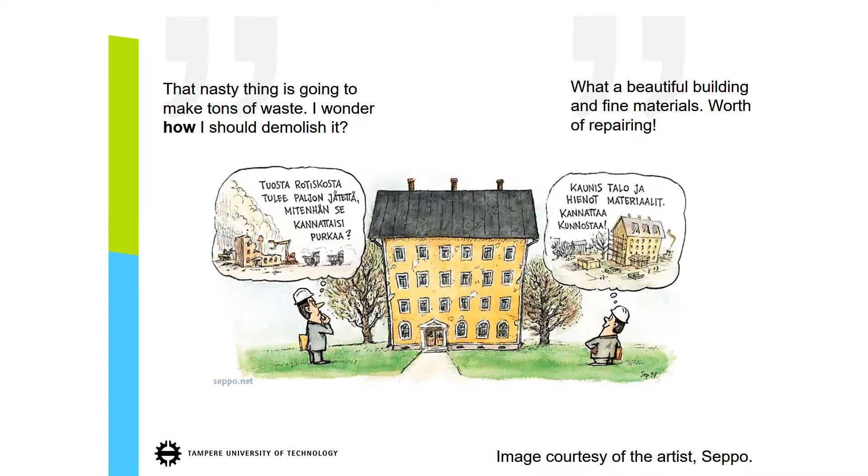Here's the fundamental question of the lecture, or even the day. I chose this image because it quite nicely underlines the very relative and subjective nature of this question.

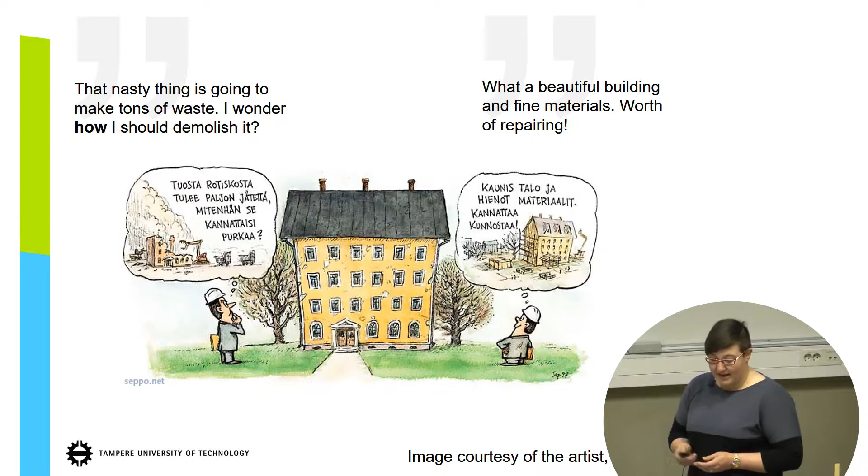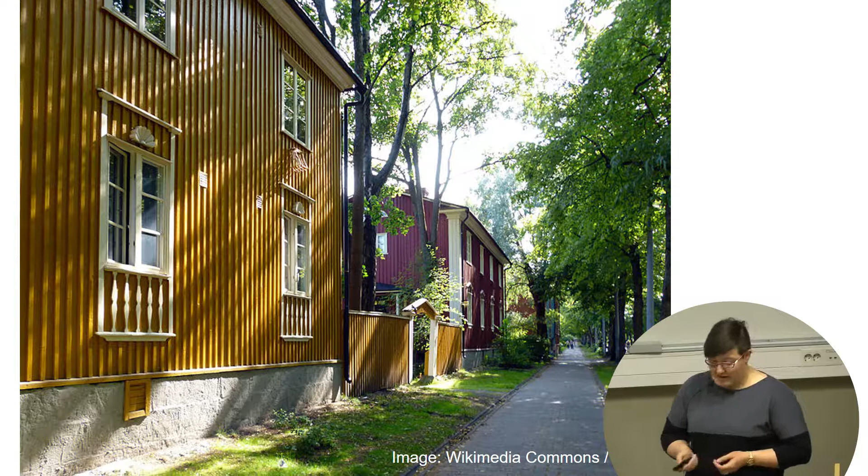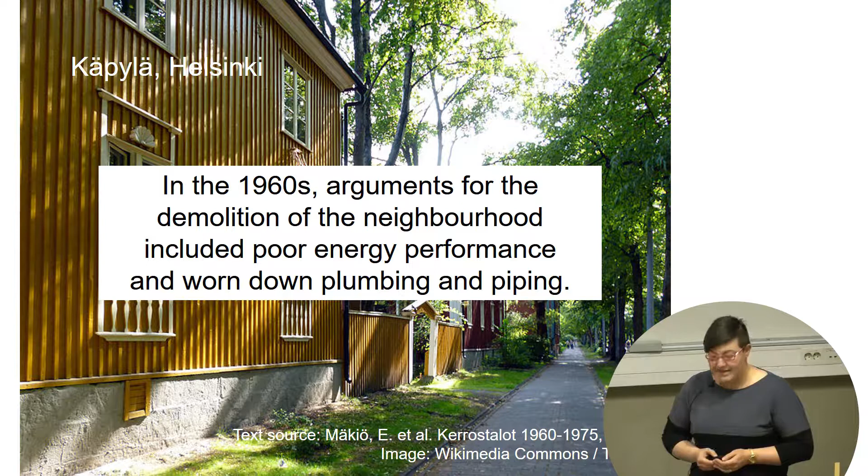What we see as worthy to keep varies not only between individuals, but also in time. This is a Helsinki neighborhood that is today very precious, high prices, but in the 60s the arguments for its demolition were awfully similar to what we use today. Energy and plumbing. The same goes for the Finnish National Gallery Ateneum building.

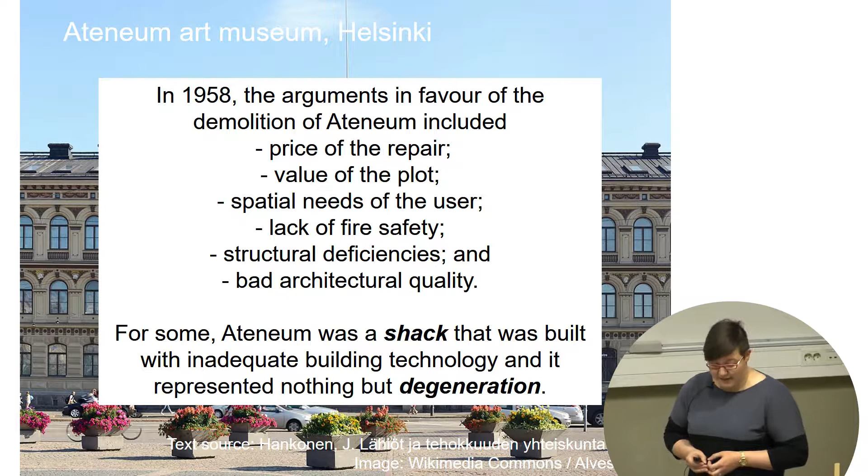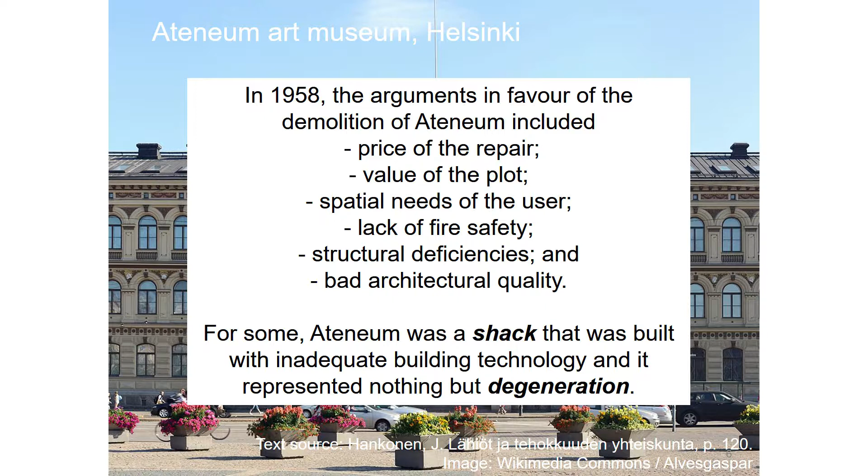In the 50s they listed almost all imaginable reasons to support its demolition. It was too expensive to repair, the plot was too valuable for this building, it didn't fit the needs of the user, it wasn't fire safe, it had structural deficiencies, and even bad architecture. Could you believe it? So today we see a phenomenon of value inversion, where we think differently.

We can conceptualize the building stock like this. We have the existing stock that consists of buildings that are normally in use, but also a part that is vacant or underutilized. You always need some vacancy in the housing market. If you didn't have any empty flats or empty premises, no one could ever move. So you need some vacancy, but a part of the vacancy is long-term and problematic.

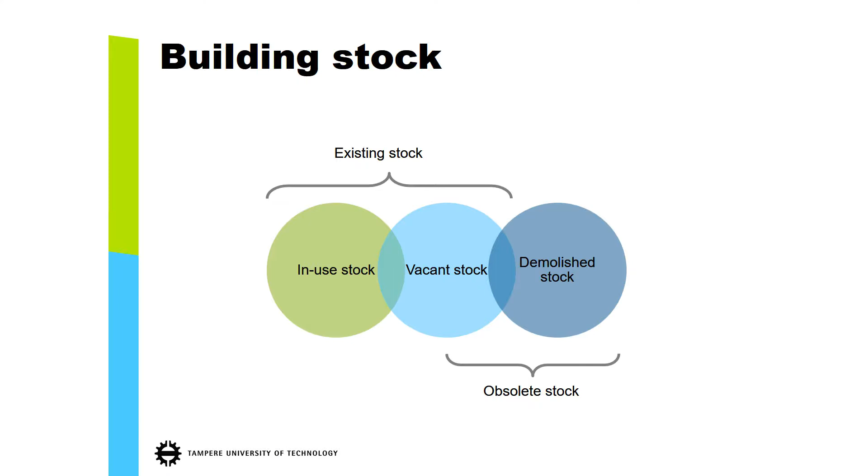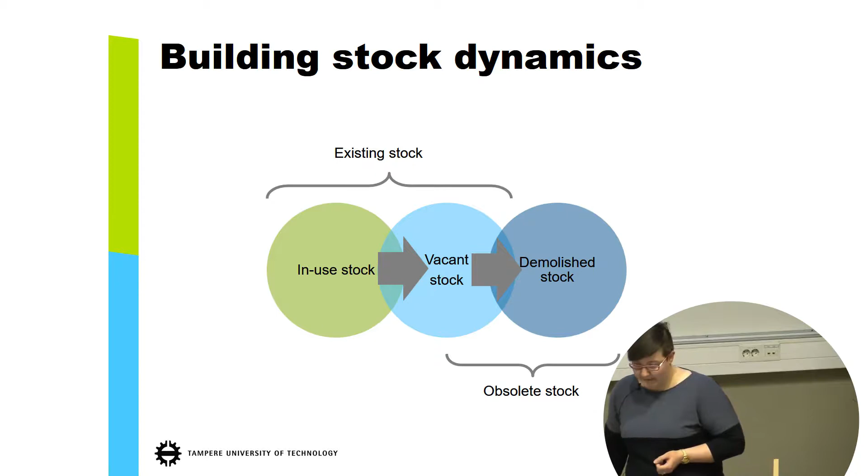And we can think that a part of this stock is moving towards the demolished stock, so it's at risk of being demolished. We can call this part of the stock obsolete, which means outdated in a sense. We often think that since buildings are completed, they are bound to move towards the problematically vacant stock and eventually to the demolished stock.

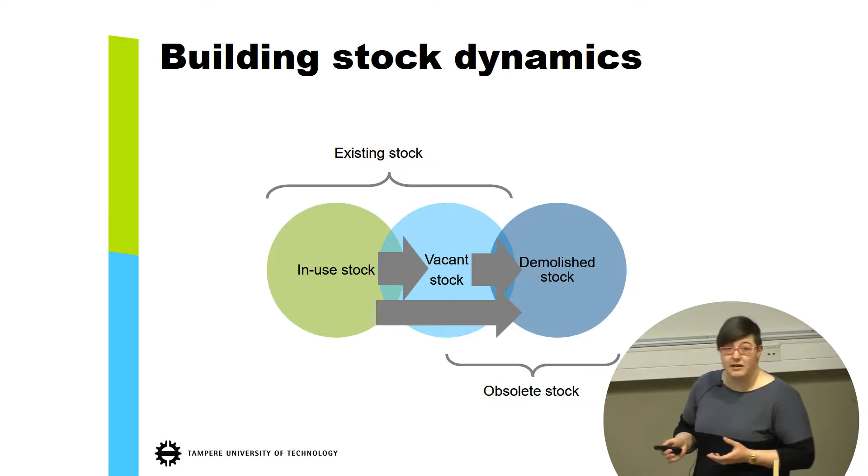But buildings are not people or biological creatures, so buildings don't have a biological maximum life. If they are maintained, they could last virtually forever. So this kind of development is really not inevitable at all. What's more, buildings are often demolished directly from use, so they never enter the vacancy phase.

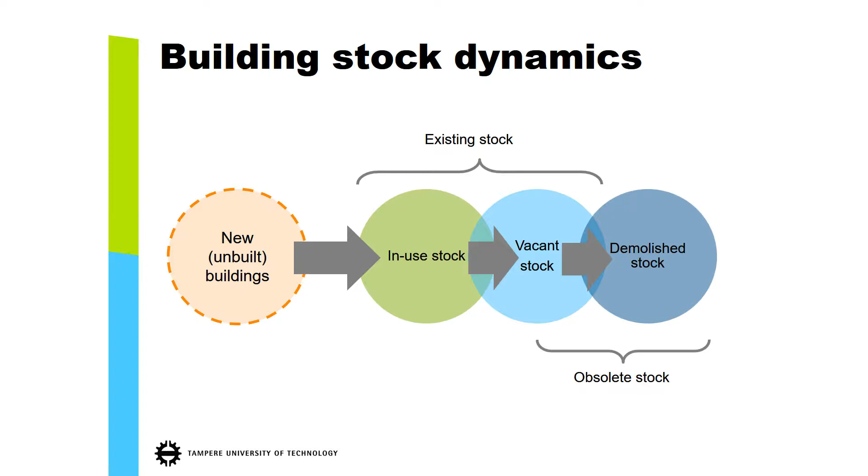This dynamic is also affected by new construction, and we can ask how it really affects demolition. We are inclined to think that we need to build new buildings to replace the obsolete ones. But if we do excessive new construction, more than is really needed, that could push some existing buildings that could still be usable to the demolished stock.

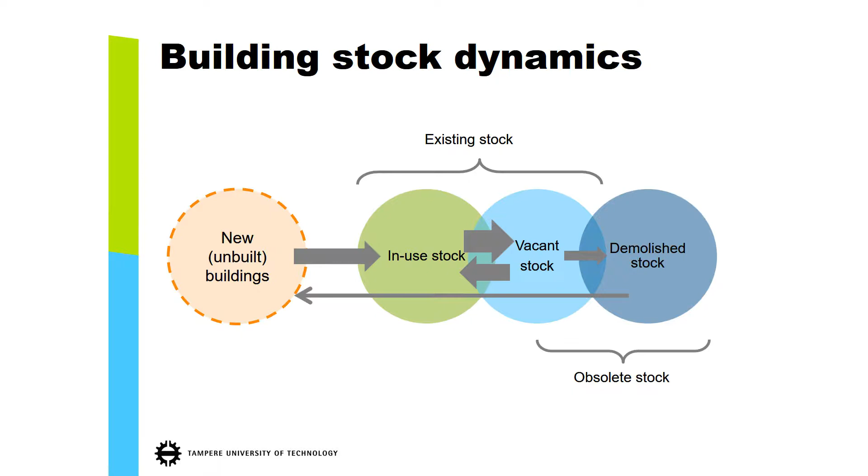In a more sustainable system, this path would not be linear, but buildings would return from obsolescence to use, and as a result, less would be demolished and less would be built. The demolished buildings could act as sources of recycled raw materials for new buildings as well as for repairing buildings.

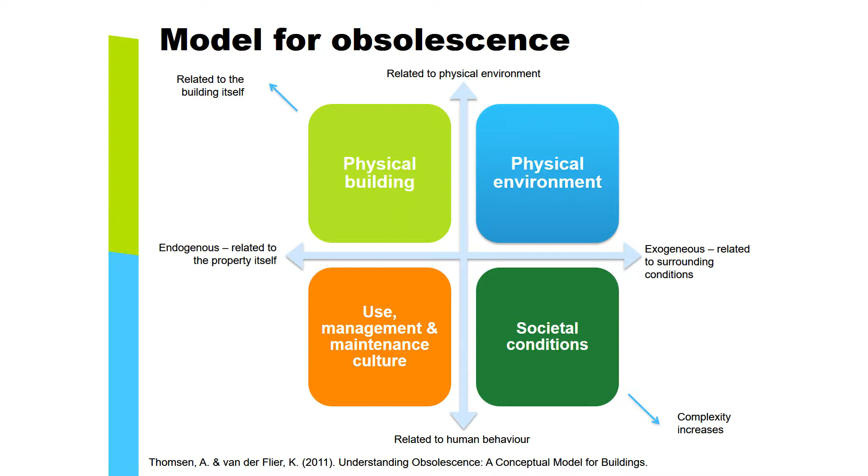So we can measure some qualities of buildings objectively, like the energy use, how much energy a building uses. But whether that amount of energy is a lot or a little, good or bad, is a question of your expectations. For example, the norms we have for new construction would belong to this corner. They also inform your expectations for older buildings as well.

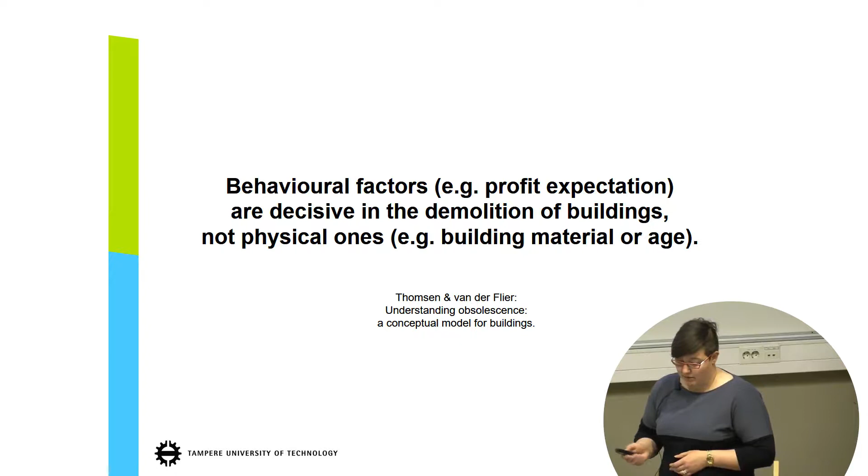In the end, researchers have found that behavioral factors are decisive for the demolition of buildings, not physical ones such as material or age. For instance, if we look at the average ages of demolished buildings in Finland, residential buildings are on average almost two decades older at the time of demolition than office buildings. So this year, an average demolished block of flats in Finland will be about 60 years old, whereas an average demolished office building will be about 40 years old. There's no reason to believe the structures of these two building types differ enough to explain that gap.

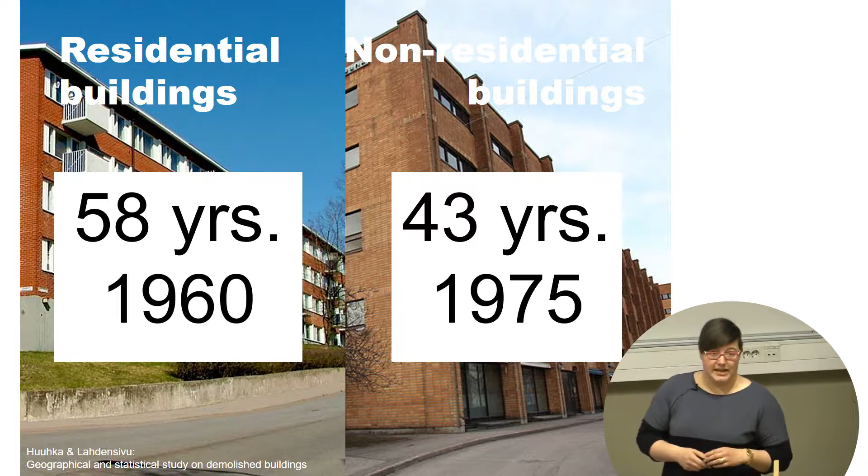Instead, you can explain it with function and ownership. The office building is likely owned by a real estate company, so it's in the hands of one owner, whereas in the block of flats, all the residents own the apartments, so you have like 40 owners or so. It's much easier for a company to decide to demolish than for a community of 40 people to agree on an issue like that. It also depends on the owner's expectations, because the real estate company expects to maximize profit, whereas the residents are more interested in the residential service the building provides them, not necessarily the value of the plot or how to maximize it.

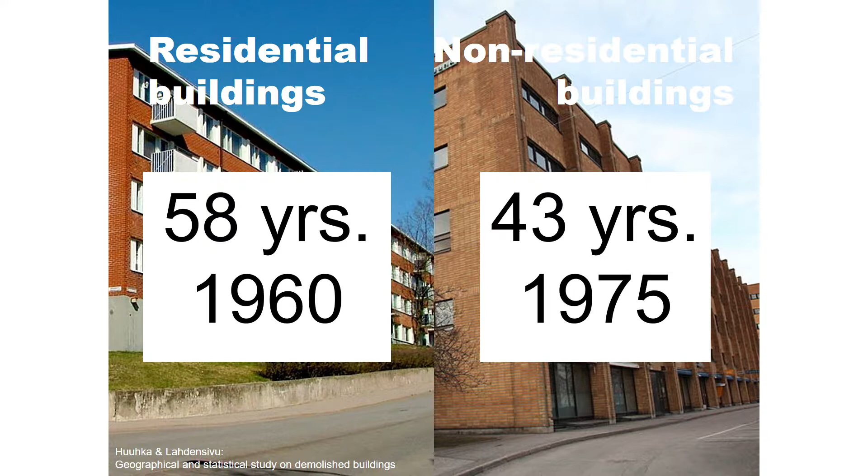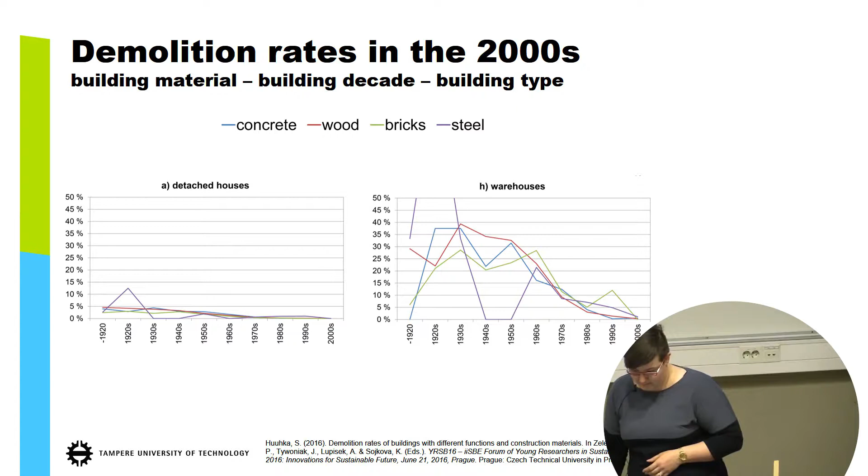If we bring the building type, the function of the building, into this picture, we can see great differences between different building types. I chose here just two examples of two extremes: detached houses and warehouses. You can see that regardless of the material, the demolition rate of detached houses is around the same. But the difference is enormous compared to warehouses. Even though there's a greater distribution here, the rates are incredibly higher. So the building type is actually more decisive than the building material or the building age.

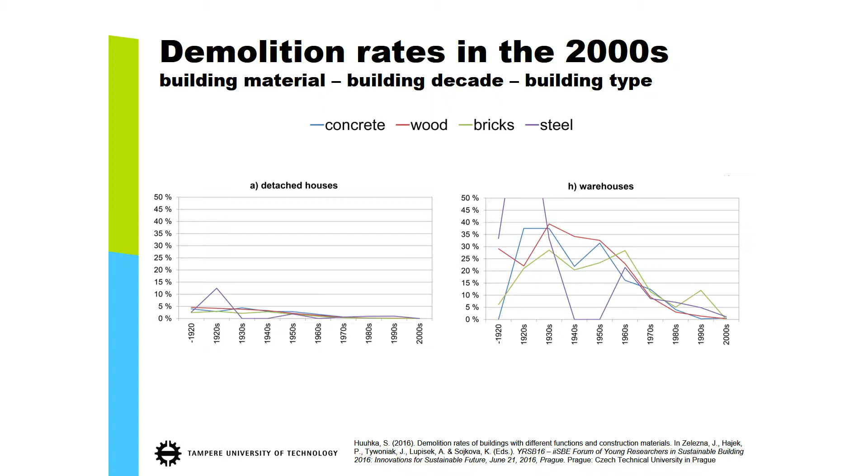Researchers in the Netherlands found that demolished buildings often do not represent the physically worst part of the stock, but an acclaimed bad condition is a socially acceptable reason for demolition. It's a more acceptable reason than, for example, bad business or bad residents in the case of rental apartments.

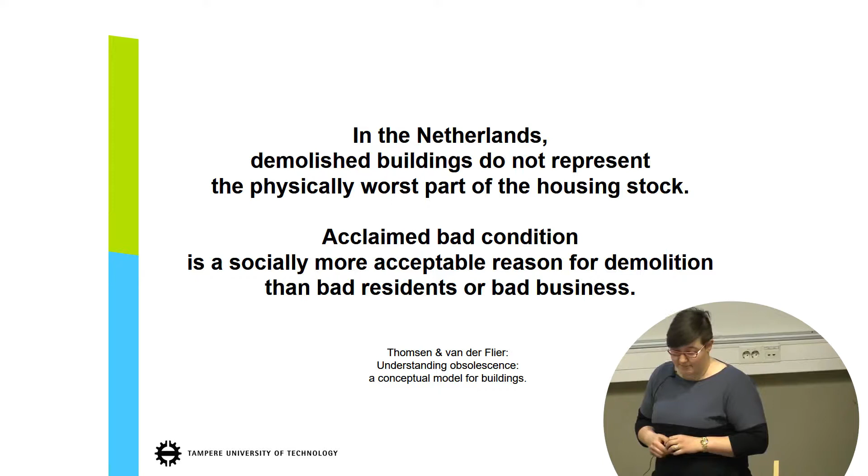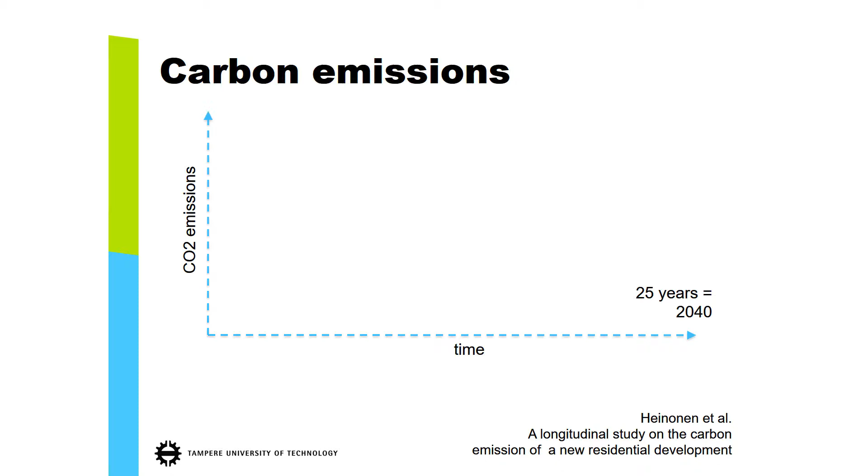Another popular argument besides condition is the energy use of buildings. I want to walk you through this theoretical comparison of carbon emissions. Here on the x-axis, we have time from this point, some quarter of a century, and on the y-axis we have the CO2 emissions. In this first scenario, we have the continued use of buildings: every year, a given amount of emission originates from heating the existing building stock.

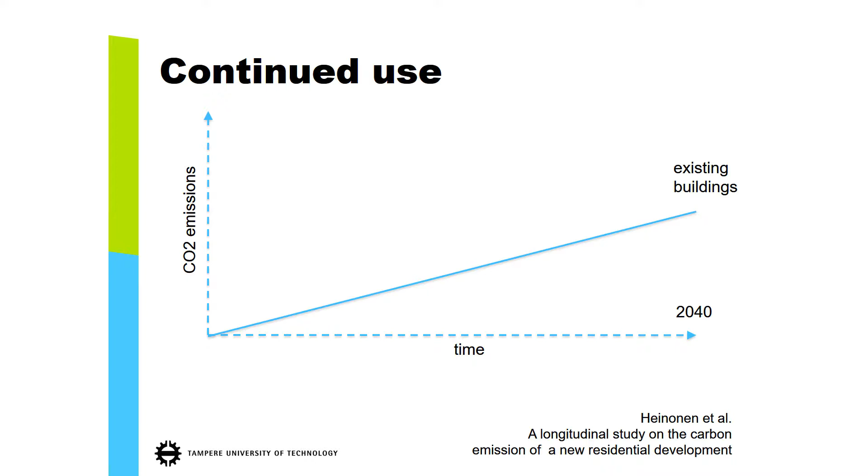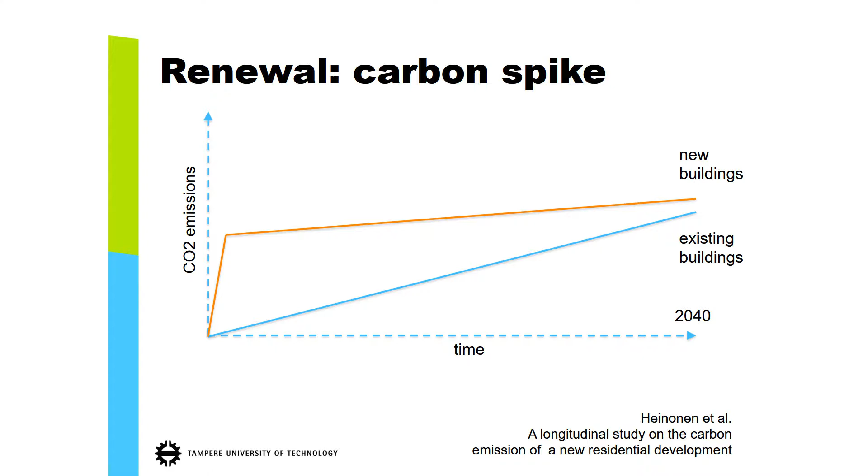And let's compare that with a scenario where the existing buildings would be replaced with new ones. You immediately notice here in the beginning this carbon spike. That originates from constructing the building, manufacturing the building material, the concrete, for instance.

So if we assume that new buildings are more energy efficient, they use less energy than the old buildings, it starts to accumulate from here. But because of the carbon spike in the beginning, it'll take more than 20 years to actually use less energy

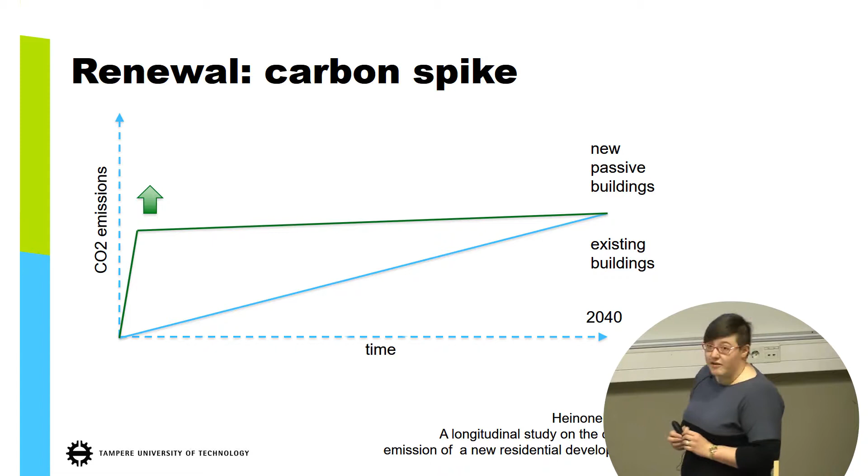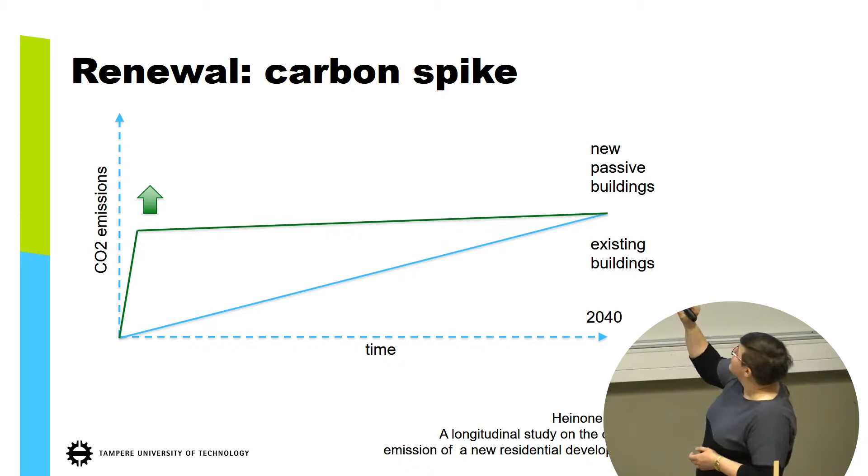than if we would just have kept using the old buildings. Building even more energy efficient buildings, like passive standard buildings, is not a very good answer either, because you get a higher carbon spike. You need more insulation materials. But the buildings are more efficient during the use phase, so maybe in 2 or 3 decades you will use less energy.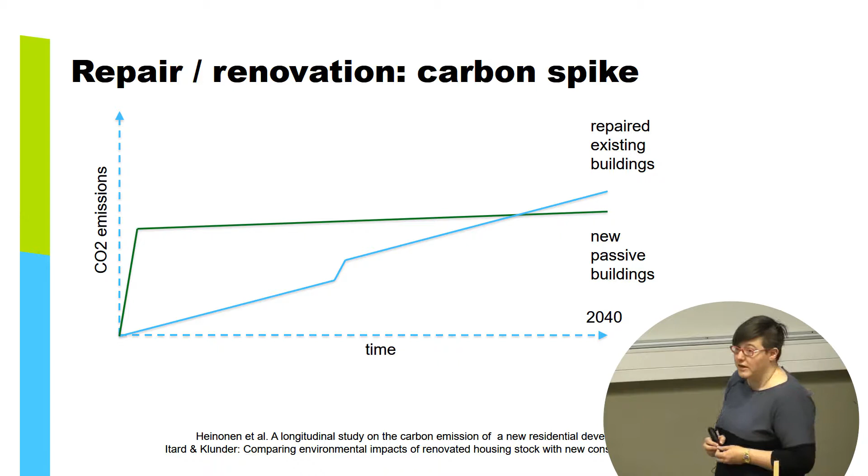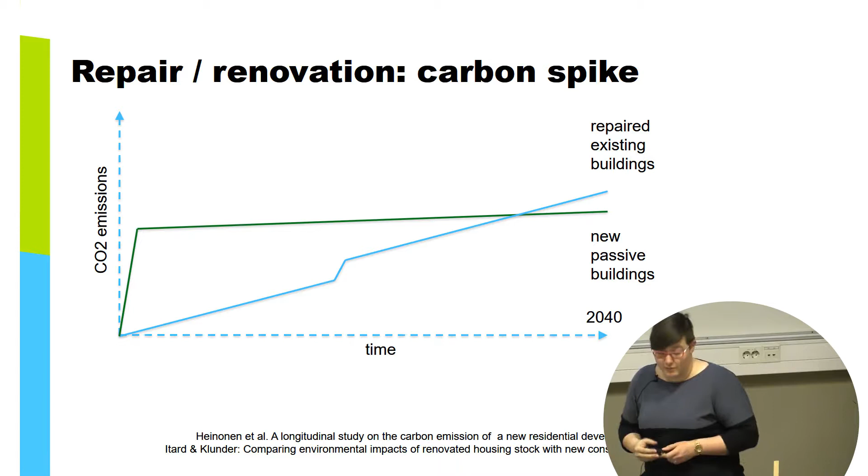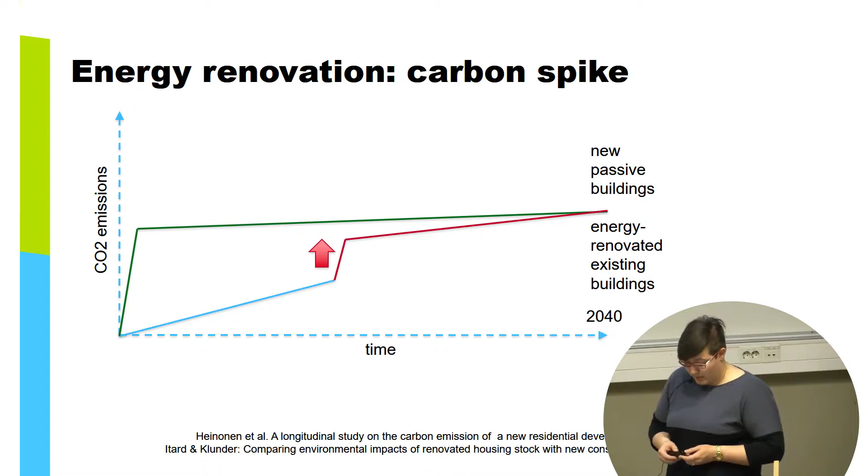Of course, we must acknowledge that we need to repair the existing buildings as well in order for them to last. So this causes a similar carbon spike as new construction. It's just smaller because the majority of the building already exists. And here too, if you increase the energy efficiency of the existing buildings, the carbon spike will respectively be higher.

So here we have all the scenarios, and now we're wondering what's the one that we should choose. And to make that decision, I have to inform you about one more thing, because this is a theoretical examination. So we assume the new buildings are more energy efficient than the old ones.

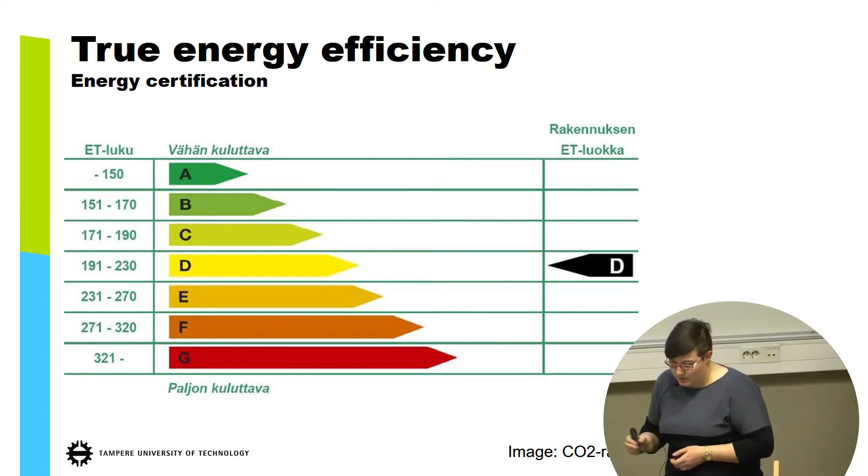But are they? And to do this, I will need to use this energy efficiency class rating. I suppose you are all familiar with this. A is better and G is worse. So according to calculation, the newer buildings are more energy efficient than the older ones.

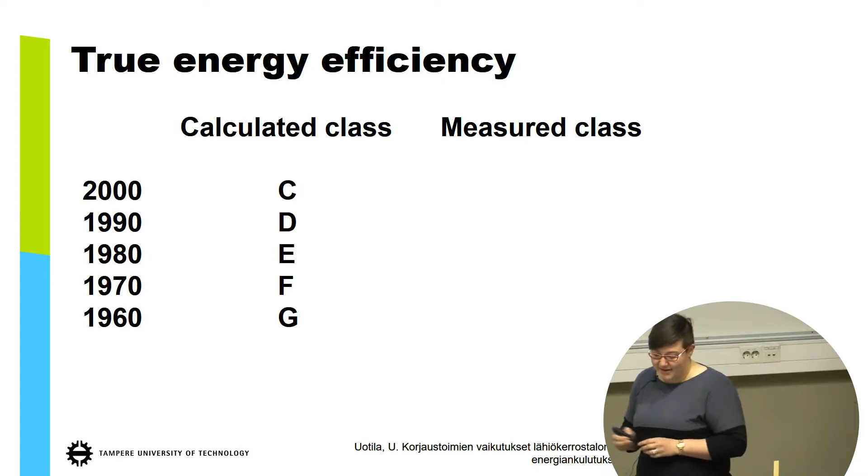Something like this. A colleague of mine at Tampere University of Technology did a research on the actual energy use. And guess what? The newer buildings were not better than the older ones. Almost all blocks of flats in this study, more than 700 of them, belong to the energy efficiency class F, which is not very good.

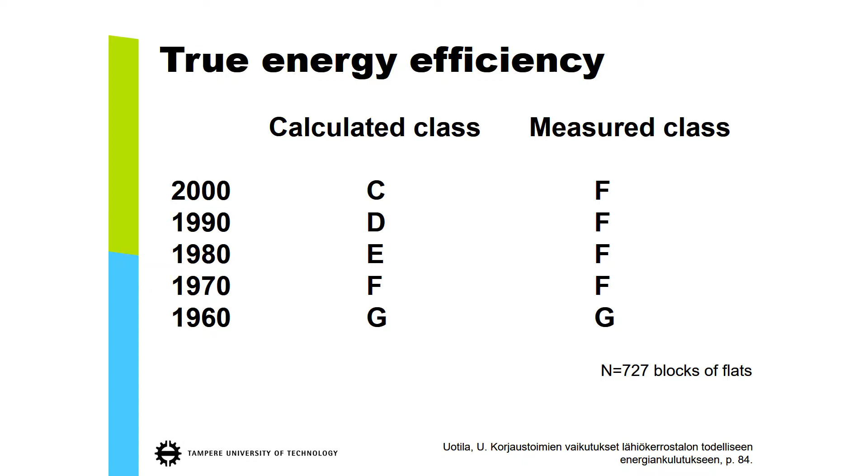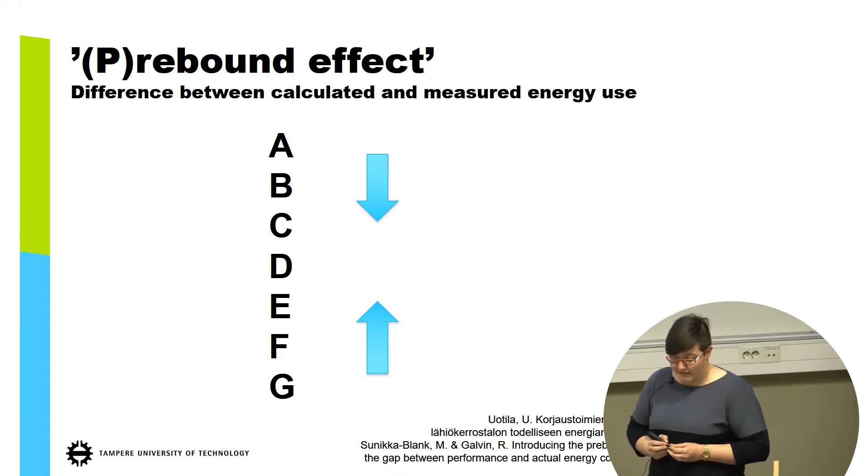And this has been observed internationally in other countries as well, and it's been explained with human behavior. So, depending on user behavior, you can actually observe a 5-fold difference in energy use in a similar building.

So apparently, people who live in less energy efficient houses are more keen to save energy because it pays back in their energy bill, whereas people who live in more energy efficient houses, they might think that they've already done their bit buying that nice and efficient house, and there's no need to pay attention to energy consumption anymore.

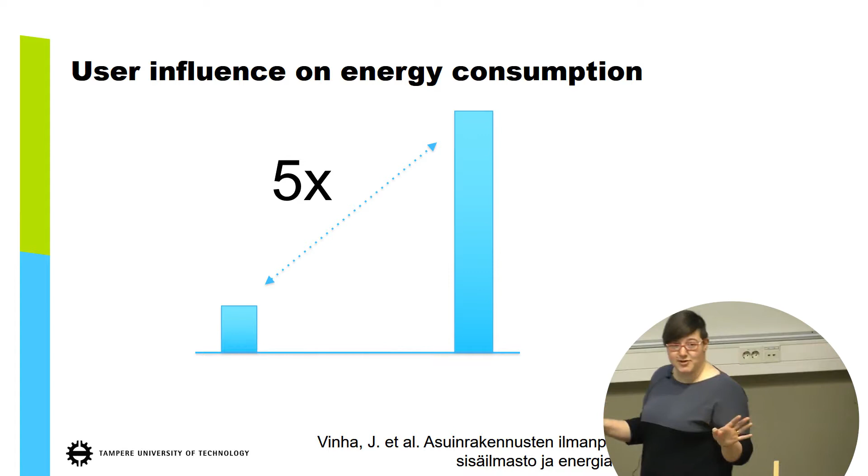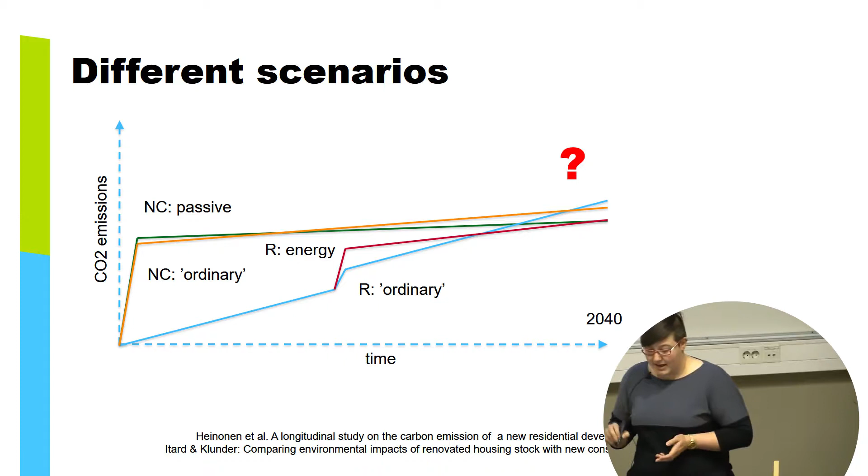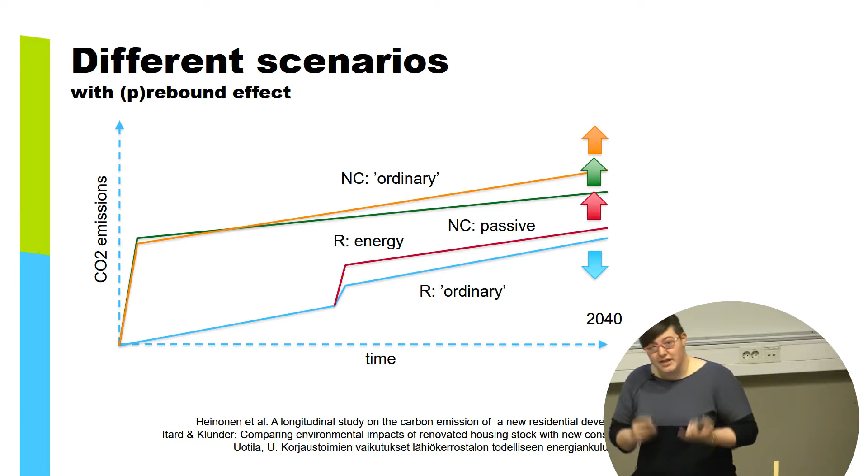This is one explanation. So I return to these scenarios and how they might look like if we take the real energy consumption into account, maybe something like this. So if new buildings in fact use the same energy as the old ones, the carbon spike will never become compensated.

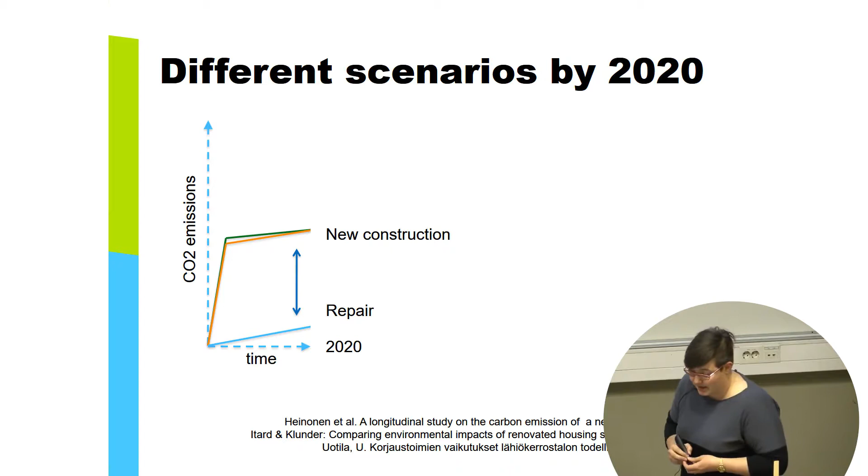What actually matters is speed. So even though you'd believe that the new buildings use less energy, we don't have time to wait many decades for them to do so.

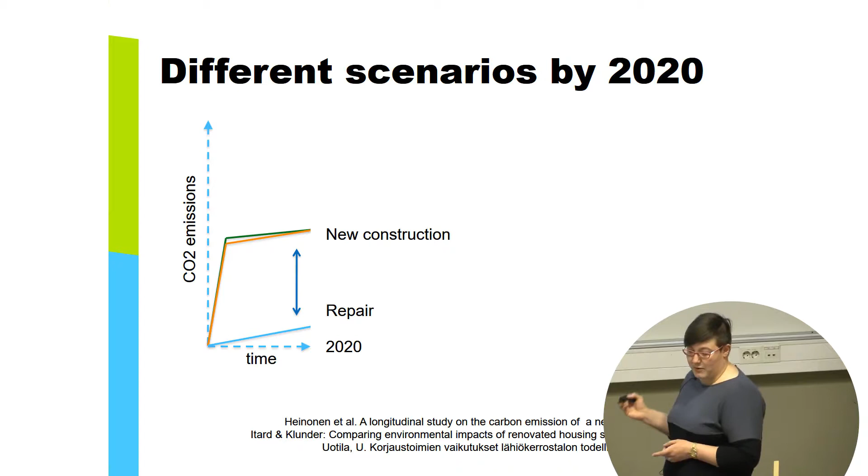The climate scientists say that we need to cut emissions now, by 2020 if possible. And as far as I've understood, it is not okay to increase the emissions in short term to have them reduced in long term. They need to be cut now. So from the climate point of view, the choice between life cycle extension and demolition is quite clear.

So in the end, it's not very surprising that we should be very careful to not accidentally promote policies that don't help us to achieve what we would want to achieve.

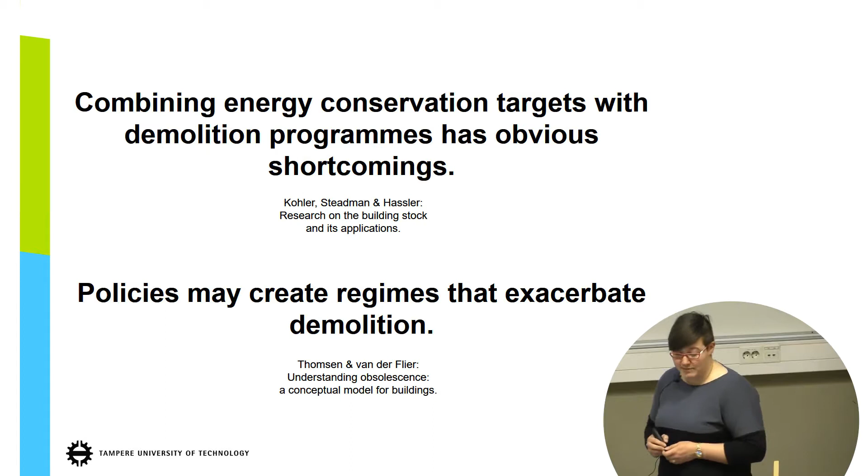Researchers have said that combining energy conservation targets with demolition programs has obvious shortcomings, and policies may unfortunately create regimes that exacerbate demolition. And they also point out that buildings should not be judged based on their current performance only, but also the potential that they withhold. That would be smart renovation.

And since this seminar focuses on panel buildings, I will now use this opportunity to show some of our research on how to unveil the potential of panel buildings.

We had a research project that looked at how panel buildings could accommodate different demographic groups. The first thing we had to do was study what kind of flats they contain, because Finnish panel buildings are not standardized.

On the lunch break, I learned that Estonian panel buildings have standardized plans, so in your research you could skip this phase. But we had to do it because the Finnish ones are not standardized.

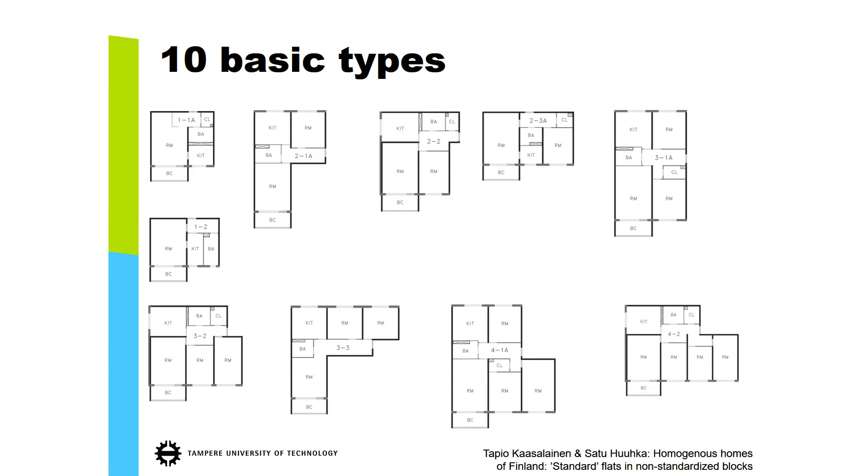So we had a sample of 9,000 flats, and we were able to identify 10 basic flat types that occur in these buildings. They have some small internal variation, but in the end there were only 18 variants of these basic flat types that covered 80% of all Finnish flats between the 1960s and 1980s.

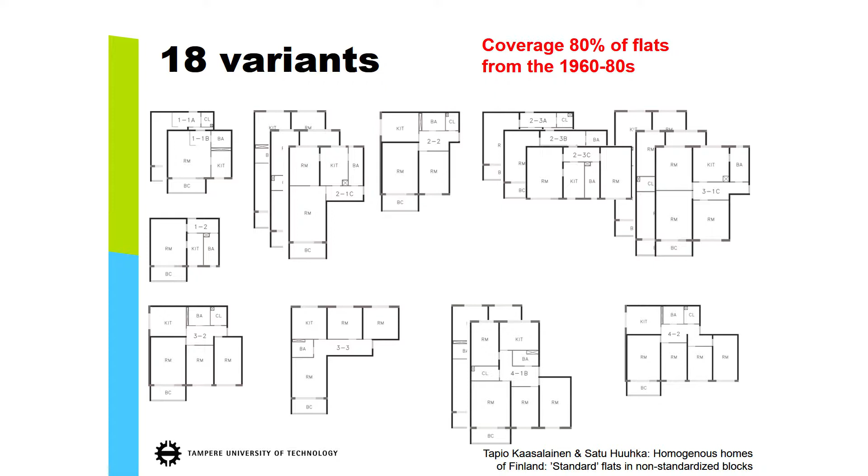But if the plans are standardized, you already know how the flats are, so there's no need to do this.

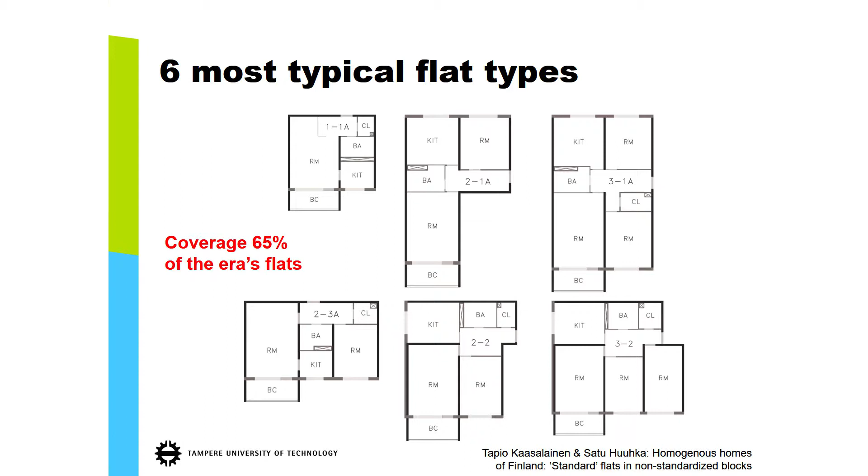Since elderly people are a major resident group in these buildings and the buildings don't serve their needs very well, we wanted to show how they could serve them better. For that purpose, we chose the 6 most common flat types, covering two-thirds of the era's flats.

My colleague, Tapio Kaasalainen, developed this 4-level model, which was applied to all 6 flat types. This model starts with little things, such as rearranging the furniture and removing thresholds, things the resident can do by themselves, which don't cost a lot.

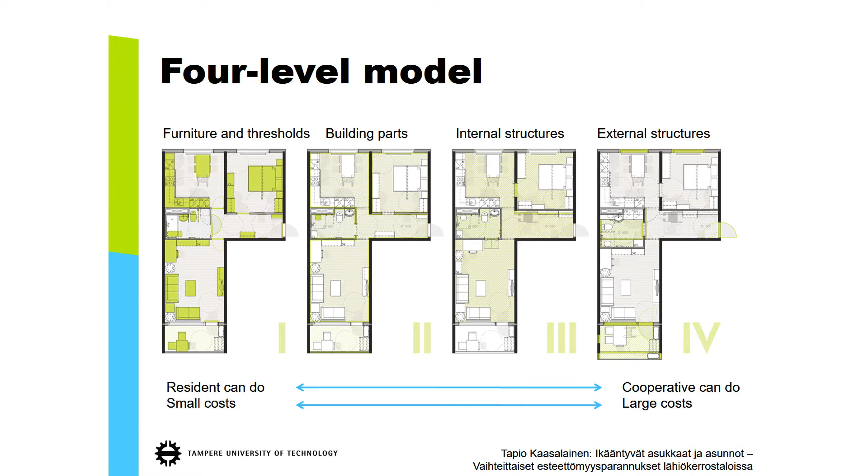And on the other end, you have extensive renovation of the bathroom, the balcony, and external structures, which the housing cooperative must be involved in. The resident can't decide on that by themselves, and the costs are larger. Then you have 2 intermediate levels between those two.

So this 4-level model essentially encompasses measures for improving the mobile accessibility of these flats, to help elderly people live there for a longer time.

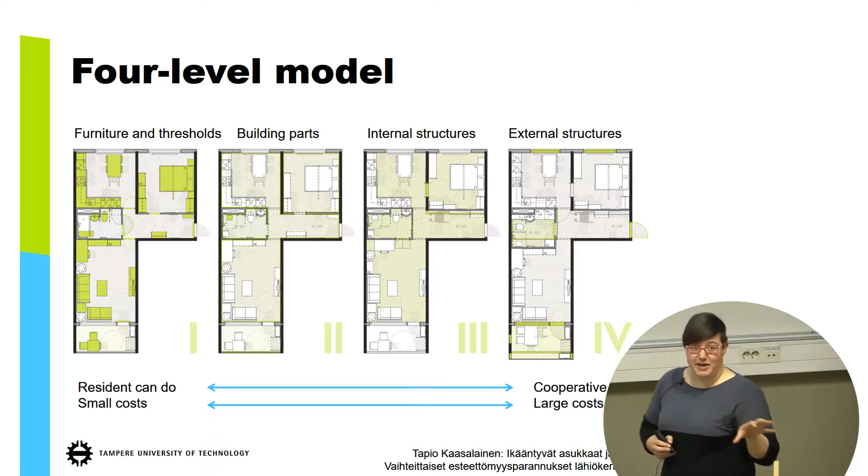And the final solution should always be customized for the individual and the flat, so you're not supposed to take standardized measures. That would be like repeating the first mistake. You're supposed to customize for the needs of the resident, and you can pick measures from different levels.

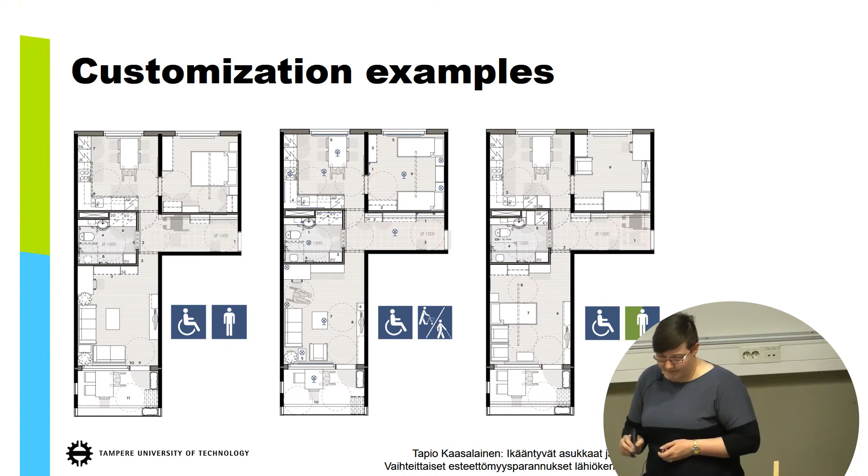Here we have some customization examples that belong to the 4th level, the heaviest alternatives. The first one is for an independent wheelchair user and a spouse who is not a wheelchair user.

The second one is for a spouse that uses a walking aid or is visually impaired. And the last one is for a bedbound wheelchair user with a spouse that assists, or an assistant that visits.

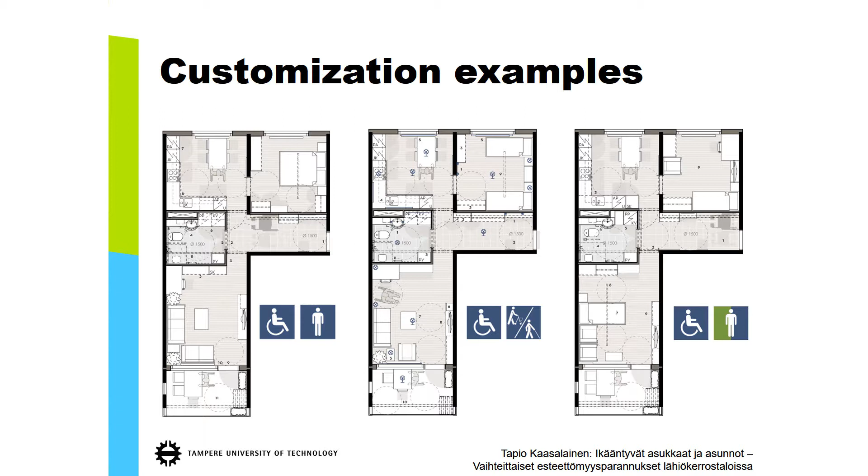Besides being customizable for the resident, this model is also customizable for the flat. So here we have some flats that represent a certain flat type, but the details are always different, so the measures are not exactly the same. We tested that this model can also be applied to flats that differ from each other a little bit.

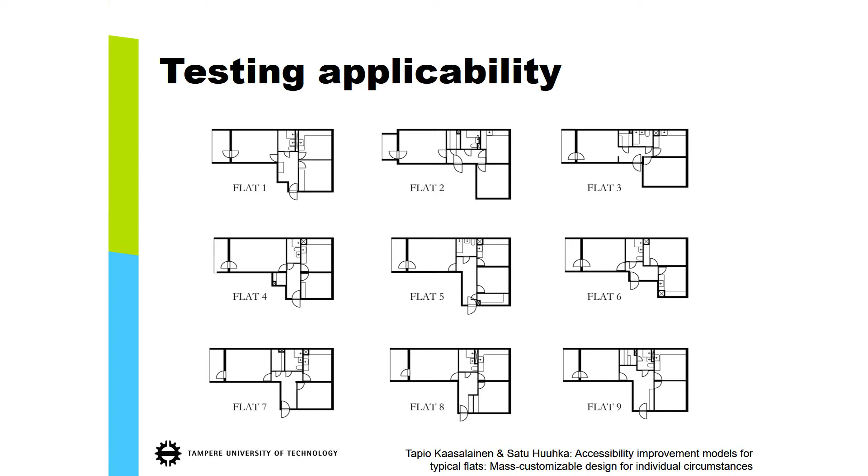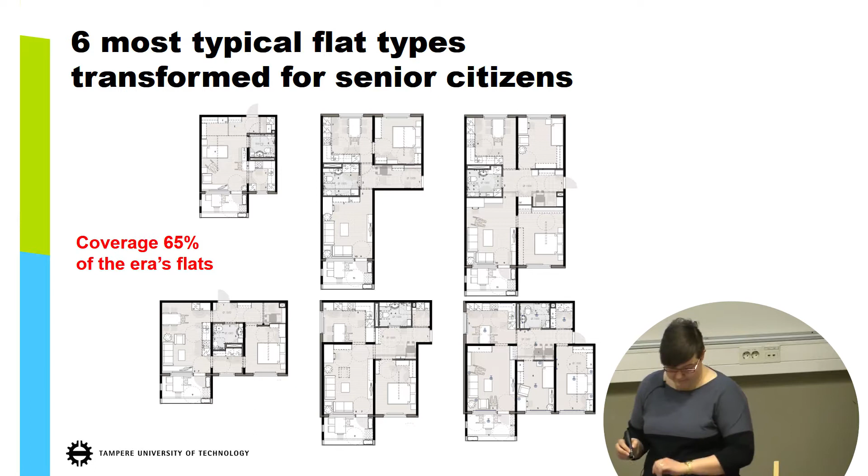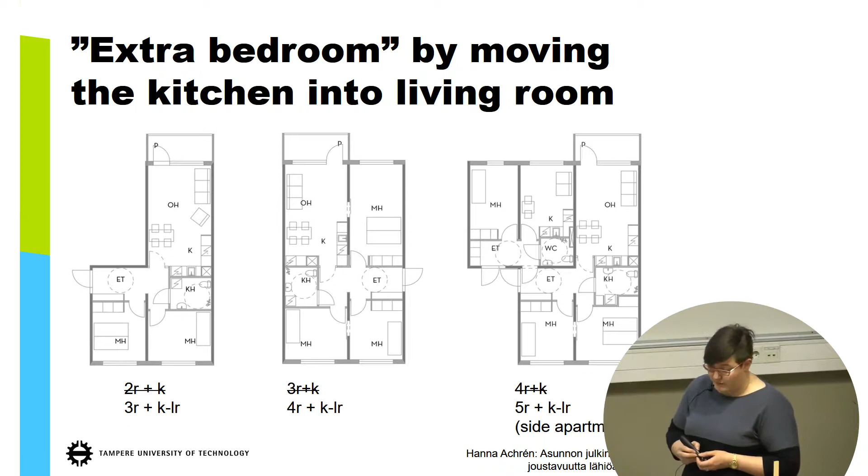Another demographic group that we wanted to look into was families, because these buildings were originally built for families, but the flats are, by today's standards, quite small, so families are now in the minority.

This part of the work was done by a student of mine, Hanna Achrén. She studied how you could improve the functionality of the flat without physically extending it, so you sort of extend it within its perimeter.

By moving the kitchen away from one of the rooms into a kitchen-living room, you get an extra bedroom. Doing this to these flat types, you can sort of enlarge them with one room, even though you have the same square meters.

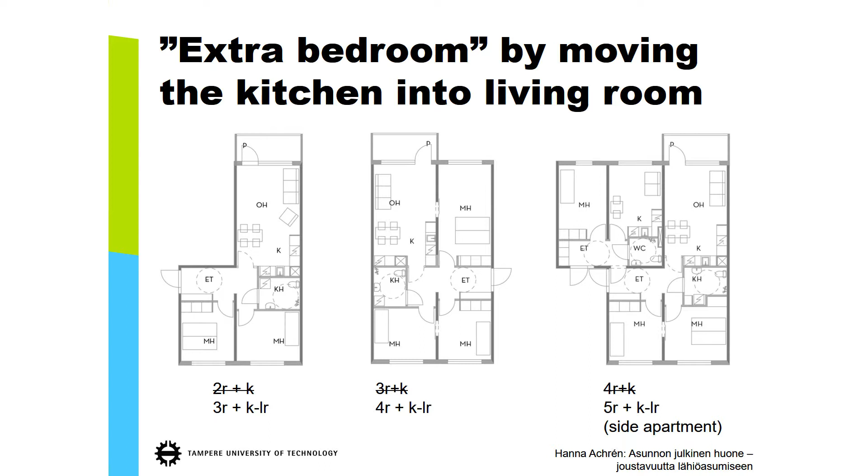Of course, this is a heavy change that must be done in parallel with plumbing renovation. You can't just go and do it by yourself; it has to happen in the whole building at the same time.

So then we also studied which flats are located next to each other, and this allowed us to study the possibility to combine flats in both horizontal and vertical directions, if even larger flats are needed for families.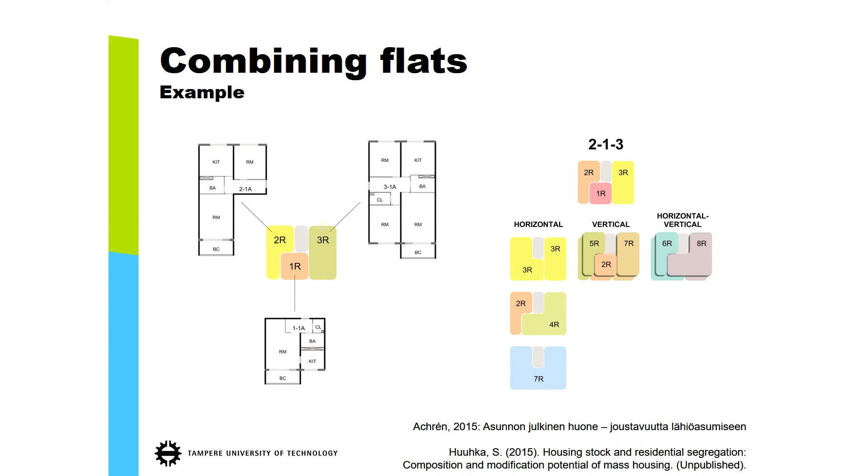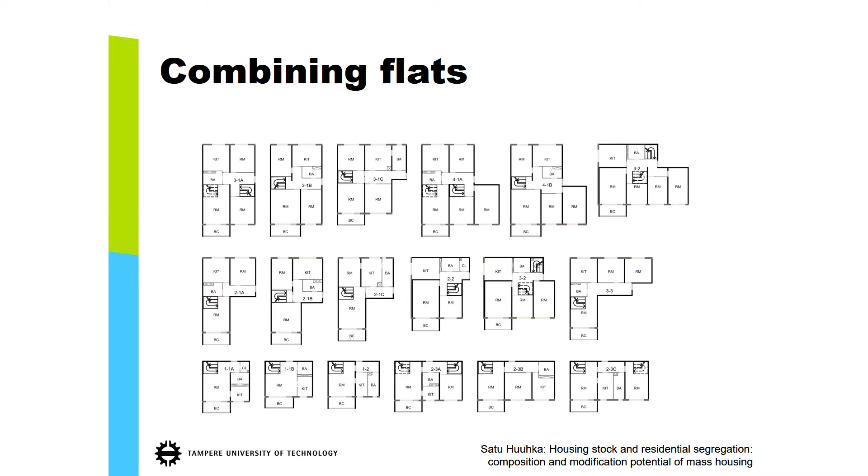This is just one example; there are many more of them. We also studied where the internal staircase could be placed in these flats, so that you could create 2-floor maisonette-type apartments for families.

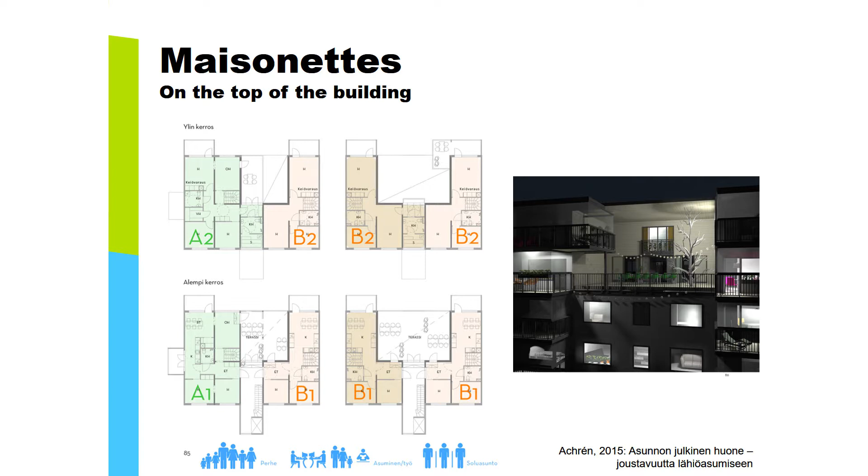This illustration shows that type of flats at the top of the building, where actually the smallest apartments were removed so that you could create a roof terrace for these maisonettes to act as their yard. And on the bottom floor, you could give these kinds of homes a private garden of their own.

It's also been suggested that some office or working facilities could be combined with living. If you have two-floor homes, on the ground floor you could also have some private businesses, and then you would live on top of the business. As the ground floor often contains only storage spaces and is quite close to the outside, this is a good opportunity to open it up for the neighborhood in a nice way.

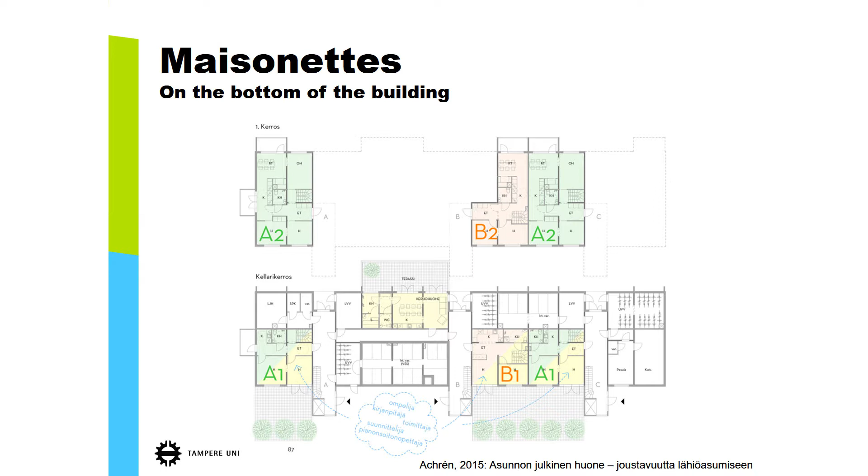So this was my brief presentation, and I will sum up a little bit. To remember from my presentation: first of all, human factors are decisive. Demolition is not physically inevitable, and the construction material has actually quite little influence. Life cycle extension is more climate friendly than new construction in most cases, and buildings have potential for adaptations, and this potential can be explored in a systematic way, and that's what I would recommend you to do in your studies.

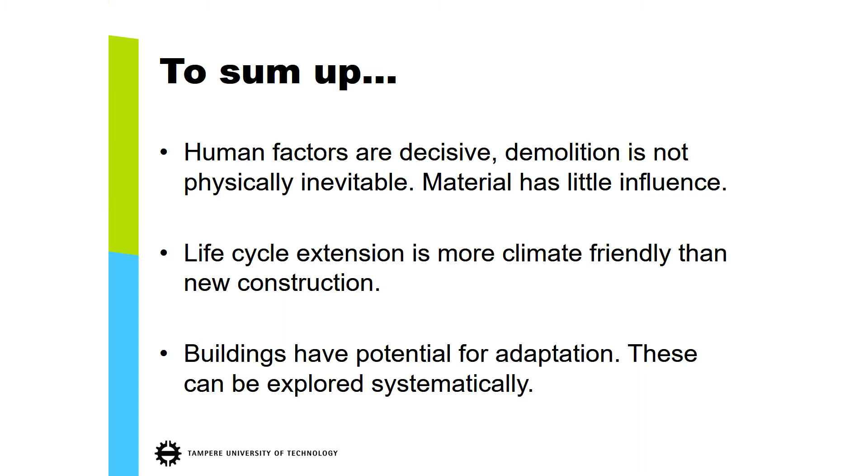So for the time being, I thank you for your attention. Suur aitäh, and if you have any questions, comments, I would be happy to hear them.